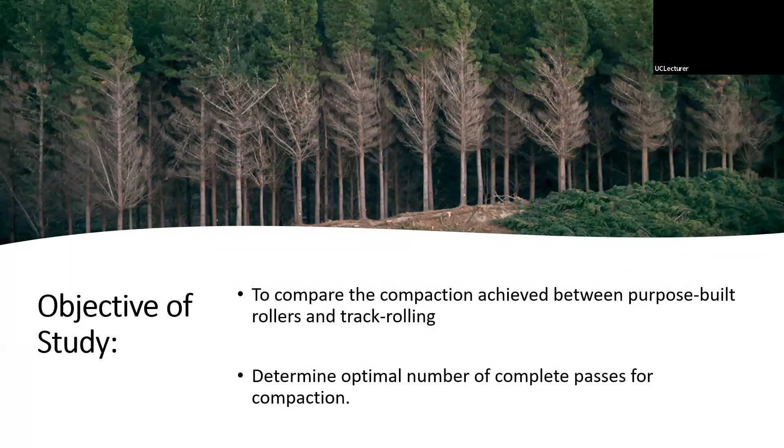Across the study, testing was conducted on 3 sites, overall identifying 4 different soils. As you can see, these sites were scattered across the central North Island area. Over the study, there were numerous steps involved for data collection and processing. These included scala penetrometer testing, surface samples, dry sieving, standard proctor testing, along with other various steps for actually setting up the fill layer.

These processes allowed for a variety of data to be gathered on the site conditions at the time of compaction, as well as compaction data. I don't really have enough time to explain in detail the processes which took place, but I'm happy to answer any questions afterwards.

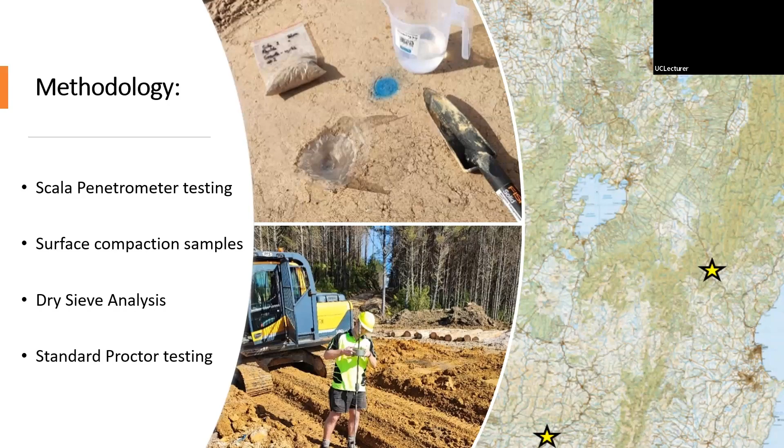To give you a bit of an idea of how the fill layers were made up and tested, here's some pictures. The layers were made up in 750mm lifts, and as you can see, the length and width of the layers were made up to enable both compaction methods to be carried out on the same layer. This was purely to avoid differences in the soil conditions, which would overall create bias within the results.

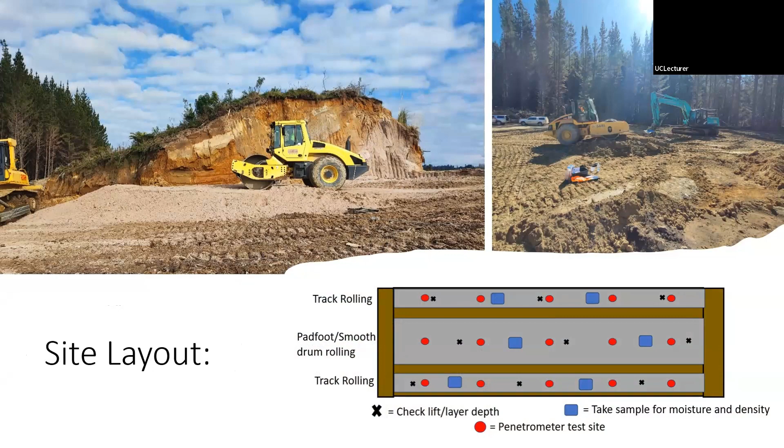Site 1 was located in the Manawatu region outside of Hunterville, with testing being carried out on broken up papa material. At this site, both a D6 and a 7-ton smooth drum roller were used for testing. Data show that the smooth drum roller outperformed both at the surface level and at depth, with surface samples showing around 7% better level of compaction.

Scala results showed that track rolling had an optimum number of around 4 complete passes, where smooth drum was around 6. And by complete passes, I mean complete forward and backwards over. These results show that the smooth drum overall delivered significantly higher results, with between 25 to 45% greater compaction when comparing it at different depths of the profile.

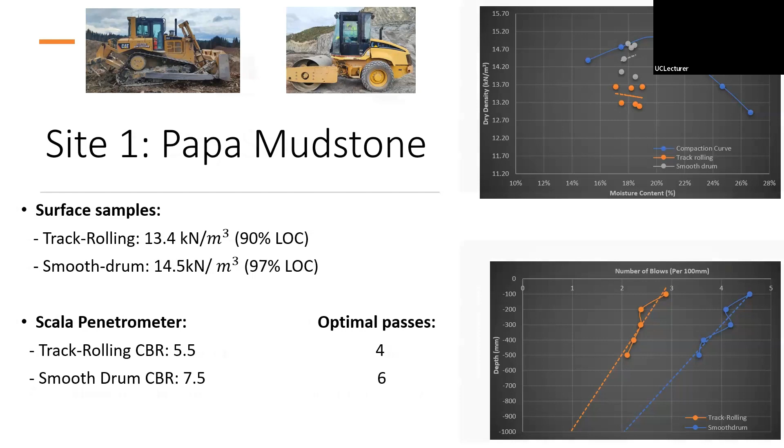Site 2 was located in the Bay of Plenty between Rotorua and Tauranga. Both dry sieving tests and S-map data determined that it was an allophanic clay soil. Compaction testing at these sites used a 14-ton digger and an 11-ton roller.

The data showed that both track rolling and smooth drum rolling yielded comparable results, with dry densities of both lots of surface samples measuring around 8.3 kilonewtons per metre cubed. This correlates to around 94% level of compaction when comparing against that compaction curve.

As you can see, the samples taken from the site show quite a high moisture content, above that of optimal. Because of this, the vibe was opted not to be used on the roller, as after the first pass, you could really see the ground was kind of turned to mush.

It can be seen that for both compaction methods, the optimal number of passes was around that 6 to 8 mark. Overall, the soil showed poor strength when compared to the other sites. This is thought to be because of the high moisture content and the fact that it is an allophanic soil.

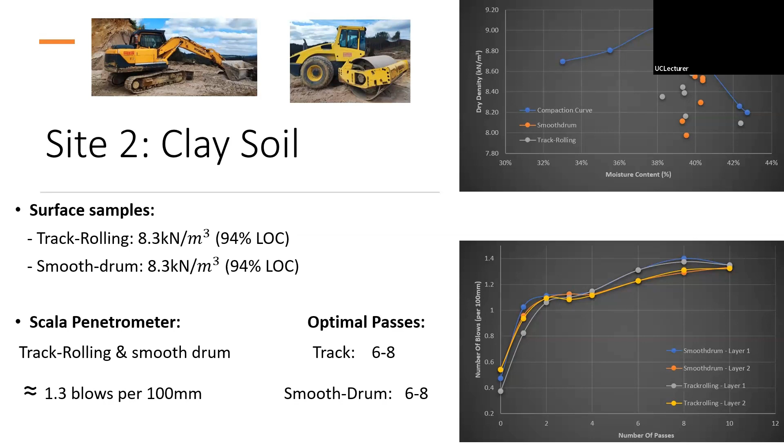The second soil tested at site 2 was a broken up rhyolite soil, which had a composition which fell into the sandy clay loam category. Given the on-site compaction conditions and the compaction curve, surface samples showed that the track rolling achieved 94.8% level of compaction, whereas smooth drum achieved 98.7%.

It shows that track rolling has optimal around 4 passes, whereas smooth drum was around 6. When comparing the results, track rolling achieved on average 26.6% poorer than the smooth drum roller. And then when you actually look at it with depth, it can range anywhere between 35 and up over 100% greater when using smooth drum.

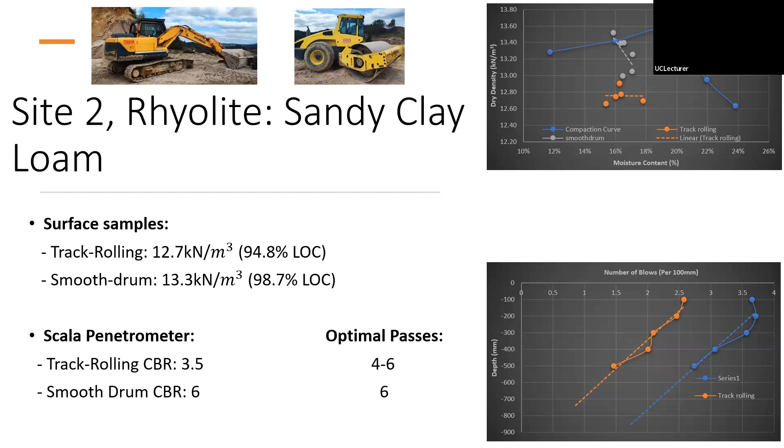Site 3 was the final site located off the Napier Taupo Road and had a sandy loam soil. The compaction curve for this site showed that the optimal moisture content was around 15% with a maximum dry density of around 15.9 kilonewtons per meter cubed. The machinery used at the site was an 11-ton pad foot roller and a 22-ton excavator.

At the site, it showed that pad foot rolling achieved around 14 kilonewtons per meter cubed at the surface level, whereas track rolling was around that 12.2 mark, with both compaction methods having an optimal number of passes of around 6.

When comparing the average strength of the layers tested for either compaction method, it actually showed little difference between the two methods when you took into account the number of passes and the depth. This could be attributed to the moisture content, which was higher than optimal.

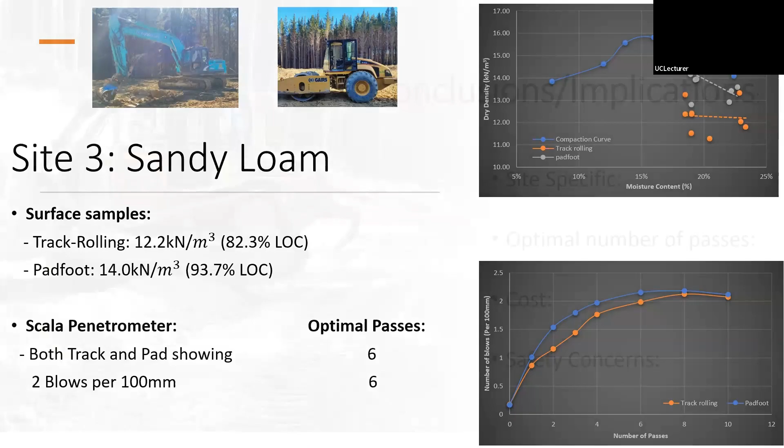Now, this leads on to the conclusions or implications. Across all the sites, it was identified that with a higher moisture content than optimal, there could be seen minimal differences between track rolling and purpose-built rollers. This shows the importance of carrying out compaction under the correct site conditions, which match the material which you are compacting. For our optimal number of passes across the sites, it ranged between 4 to 8, but predominantly being around that 6th pass mark.

In terms of costs, some wider implications of the study show that at the correct site conditions, purpose-built rollers could save money when carrying out full compaction for road construction, as they achieve a better CBR value, which in return means you don't need as thick a pavement. And this can range from the study and the sites. If you were going to build a road, it could range between 35 to 90 millimeters less pavement thickness.

And safety concerns. Despite purpose-built rollers achieving better compaction for some of the locations tested, it is recommended that in situations where operator health and safety is of concern, such as using these purpose-built rollers on rough or unstable terrain, then it is advised to use a tracked bit of machinery.